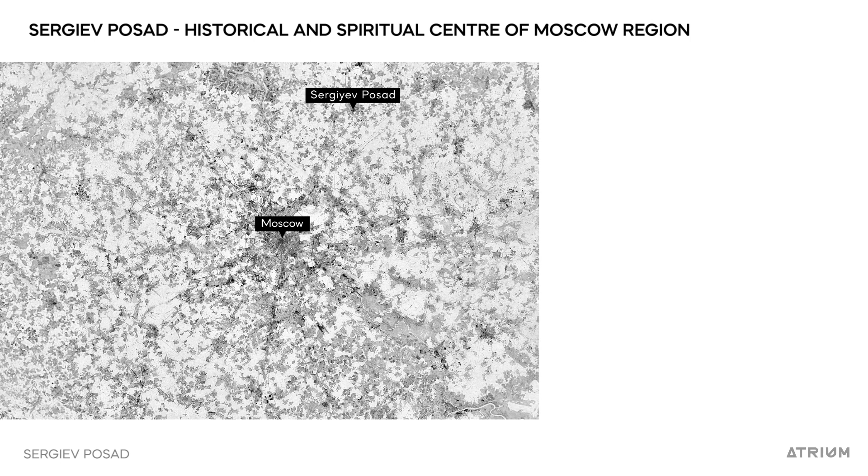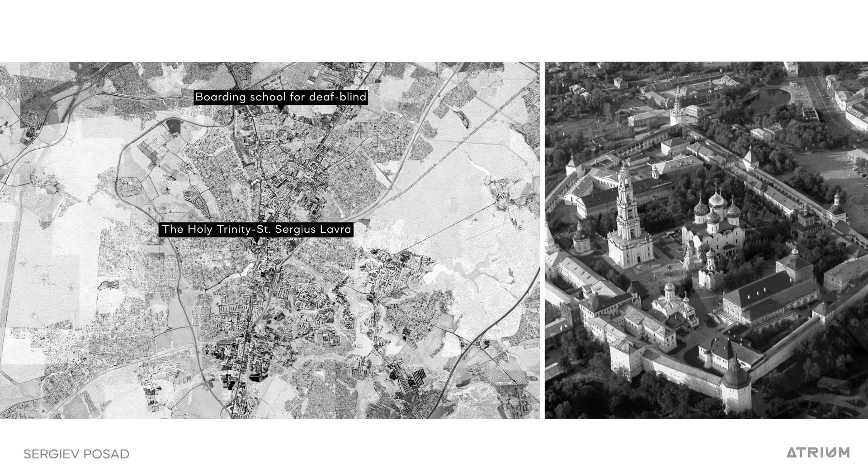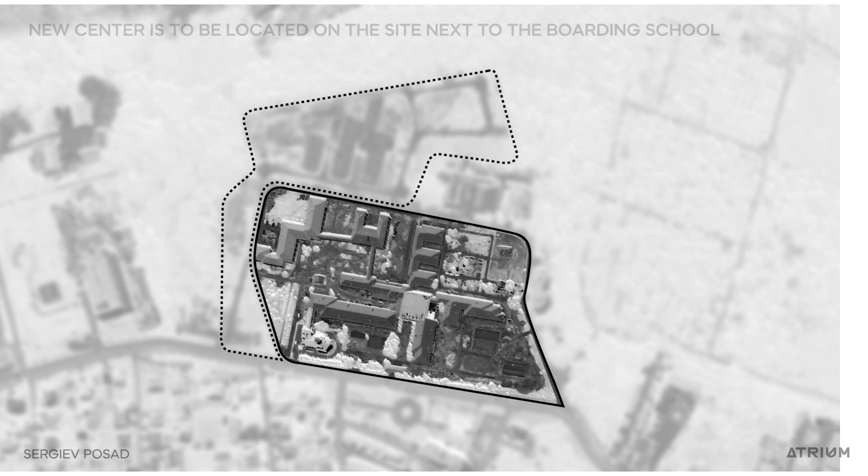The new center is a training ground for social and professional adaptation for the deaf-blind. It will provide a complex and saturated environment as a means for preparing for independent life. The design is based on 3 main principles: the building as a prototype of the city, a path as a space for interaction, materiality as navigation.

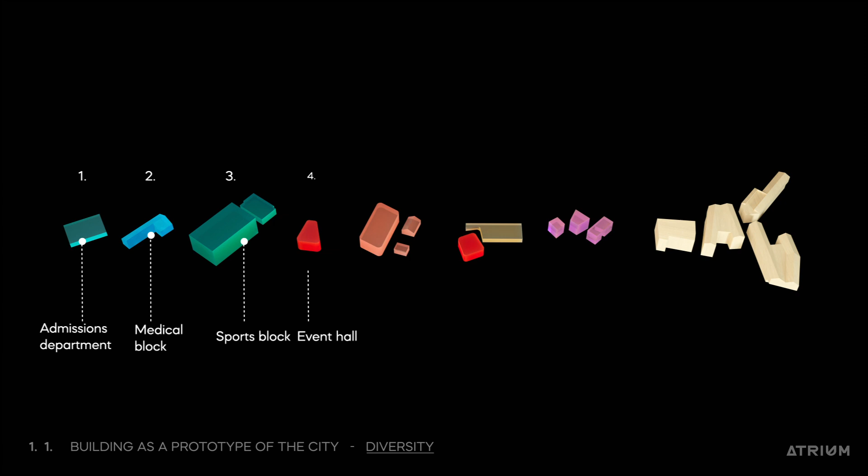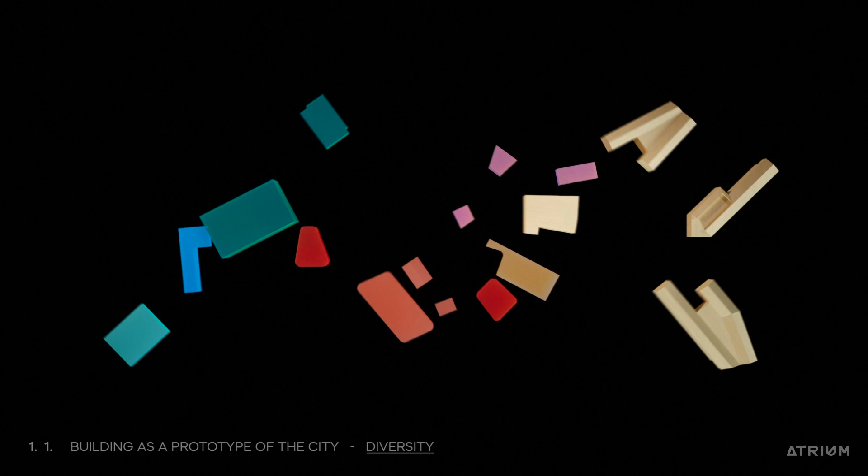The proposed building consists of several blocks, each with unique functional properties. Here, young residents will live and receive special education and medical treatment. They will be involved in public events and socialize, do sports and practice crafts. The blocks are composed in a circular pattern and are united by a common space.

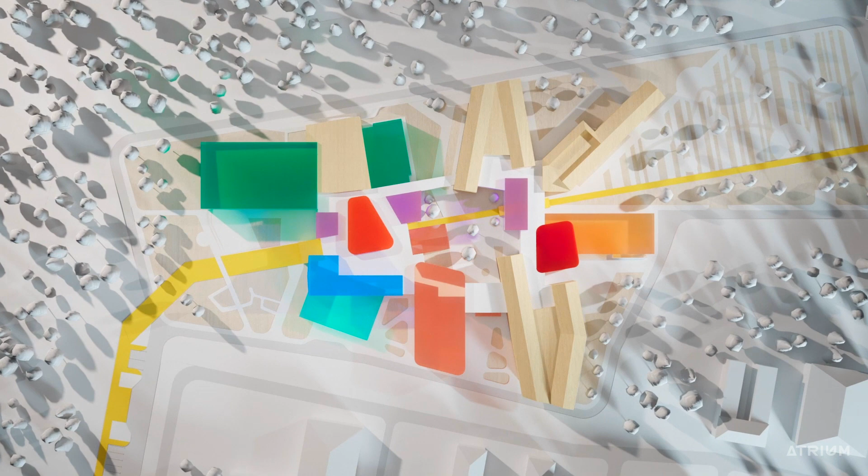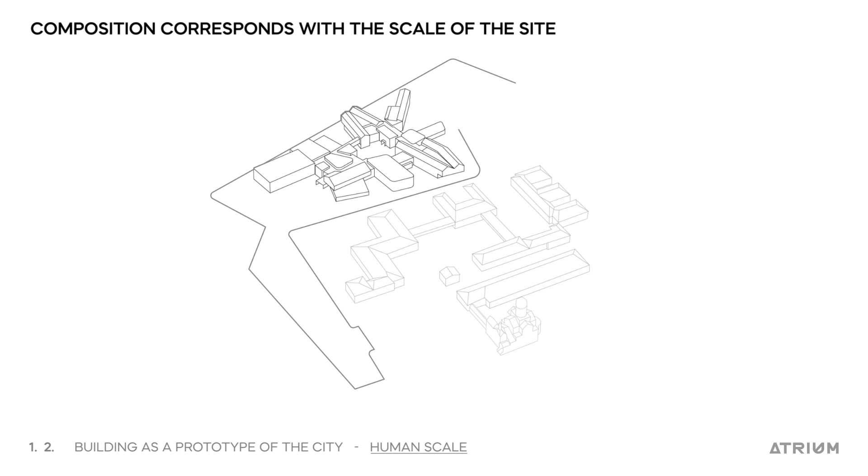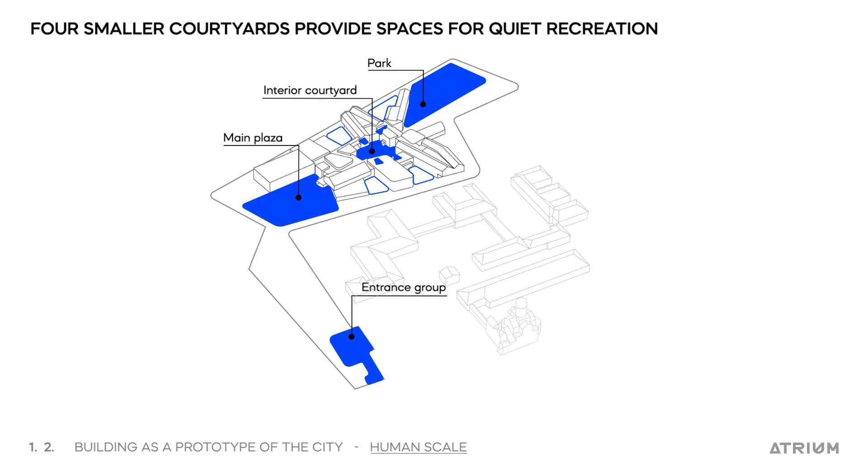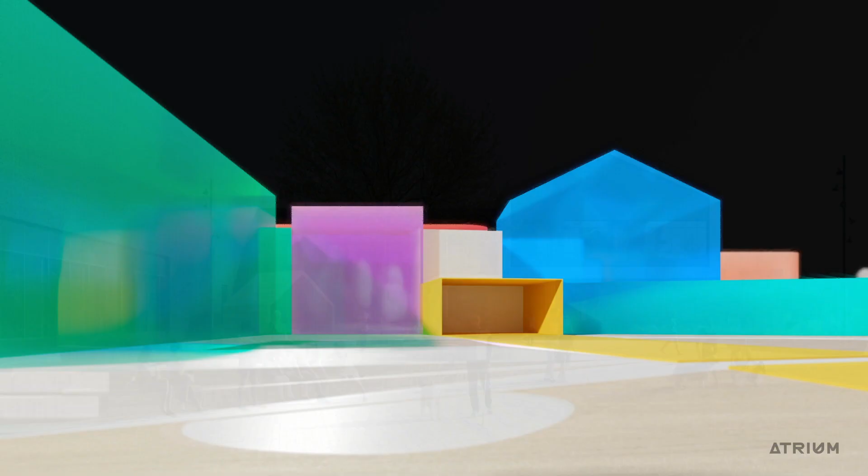They are composed in combination with a series of courtyards, creating possibilities for a range of purposeful scenarios. The composition of courtyards and blocks corresponds with the scale of the site and its users. 4 main courtyards define vivid outdoor attraction points. 4 smaller courtyards provide spaces for quiet recreation. The main courtyard opens up the front view of the complex. All significant public events will take place in front of the main entrance.

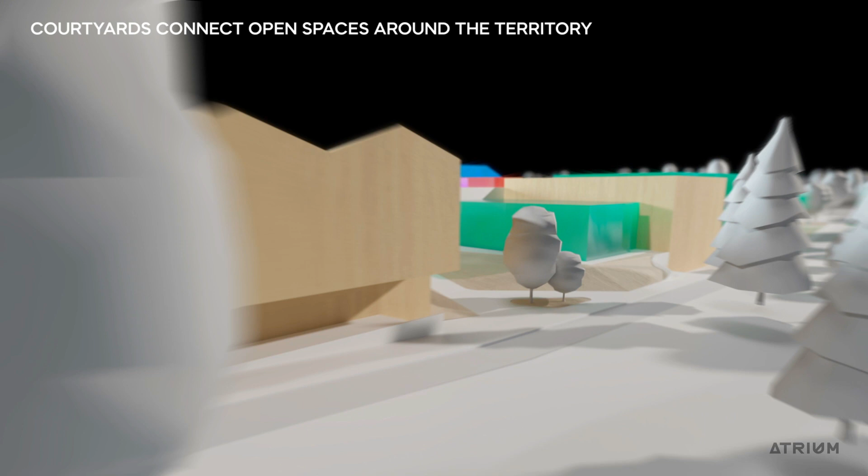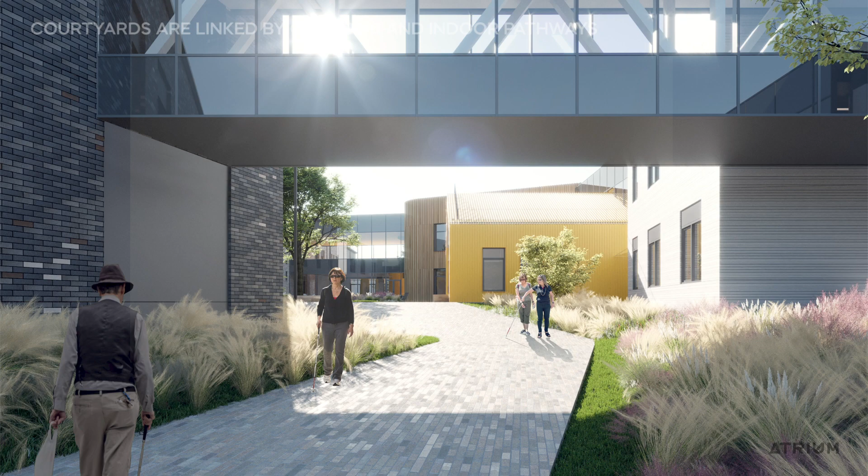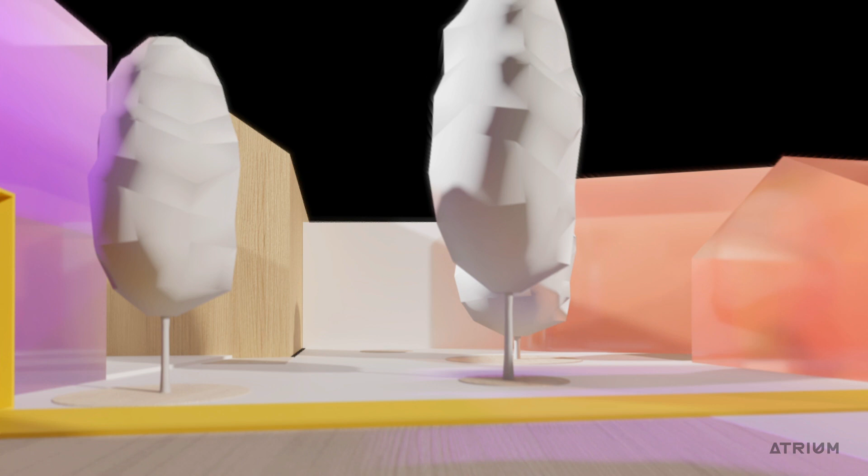Courtyards between blocks provide connections with open spaces around the territory. All courtyards are linked by pathways, outdoor as well as indoor. The interior courtyard can serve as a space for recreation and communication, and be used as a training ground to learn necessary orienteering skills.

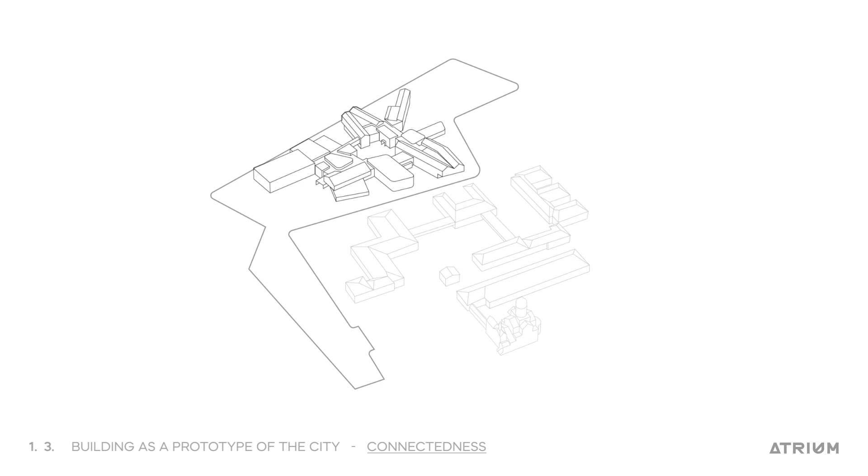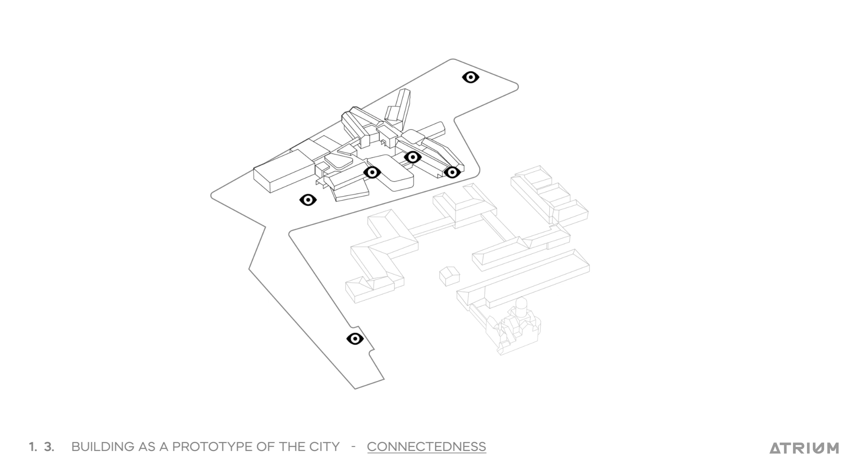The complex is spatially and visually connected to the surrounding architectural context. It is surrounded by a peripheral road. The green landscape is maximized as a way of continuing the forest on the north side of the site. Most views oversee the historic architecture located nearby. The center has pitched roofs, which resemble those of the boarding school.

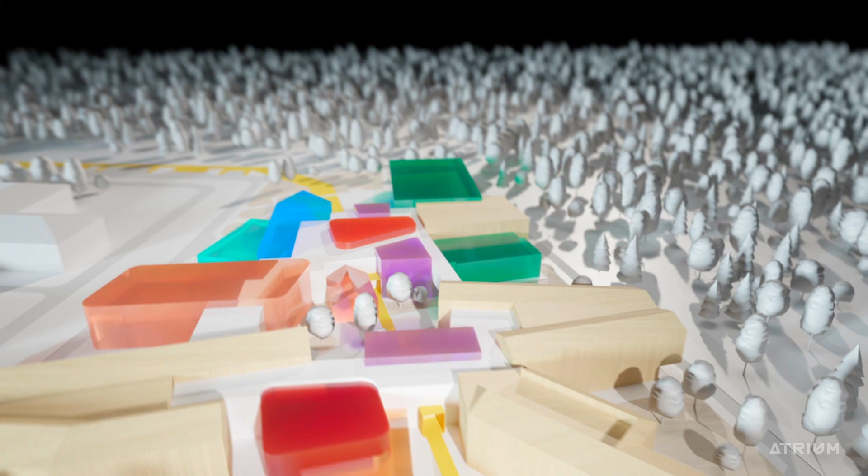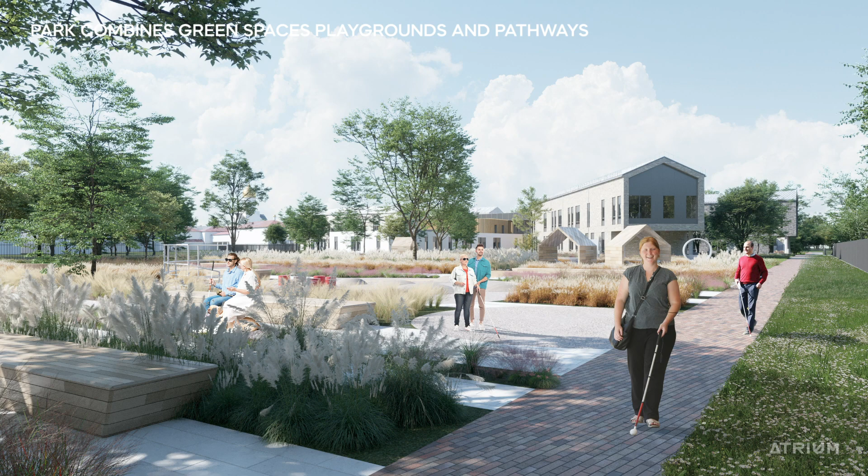Features of the architectural context, together with the diverse composition of blocks, shape the identity of the park. The park combines green spaces, playgrounds and pathways covered in different materials. The complex creates a balanced environment with its surroundings.

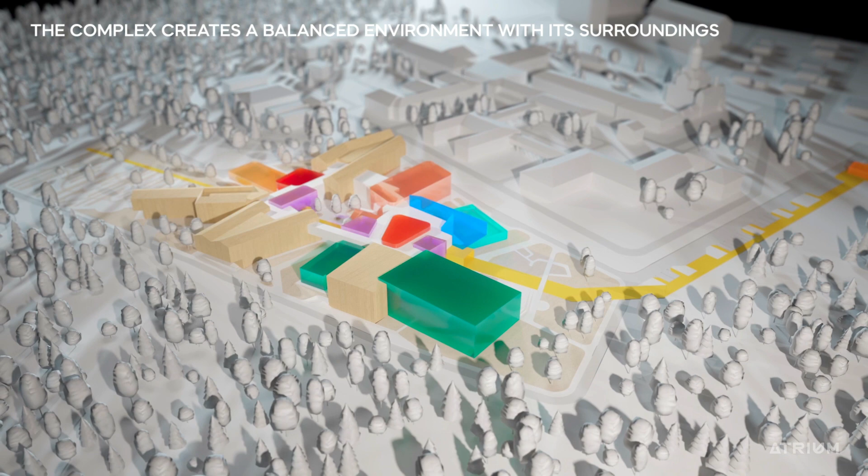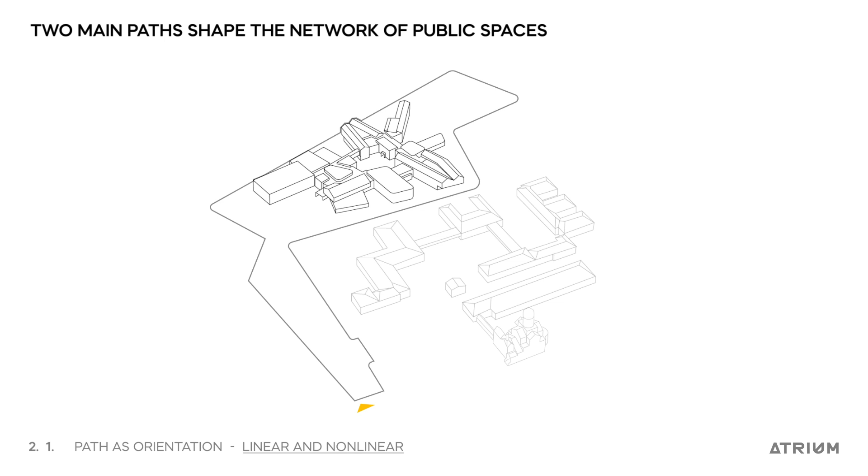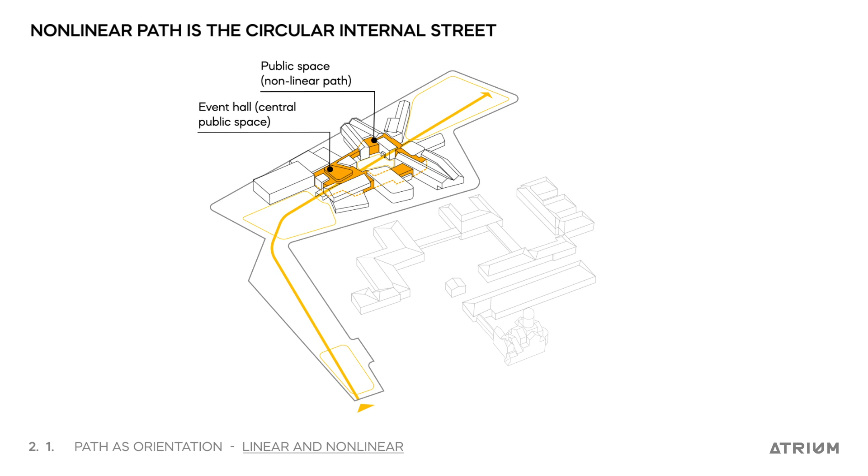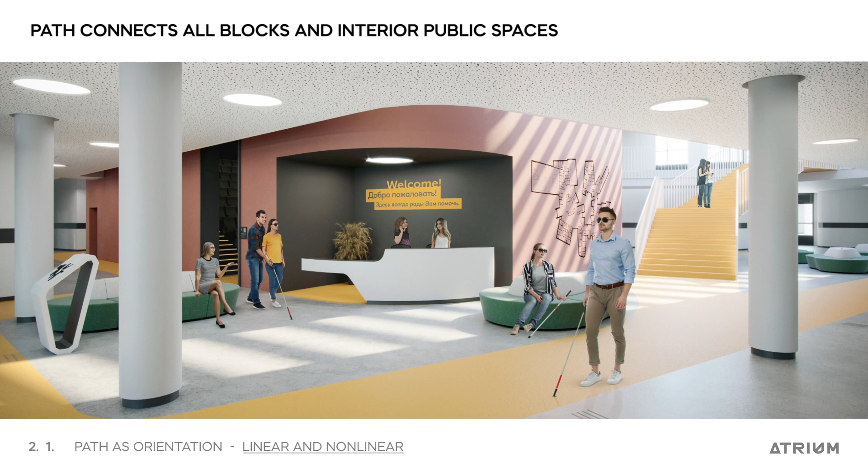Two main paths shape the network of public spaces. A linear path creates a direct connection between main courtyards. The non-linear path is a circular internal street. The path enters the building through accentuated entrance groups. It connects all blocks and interior public spaces. The path also leads to the main event hall.

In combination, the paths provide a space for learning orientation. These main streets of the complex provide possibilities for different scenarios. They recreate a lively and diverse public environment, similar to the streets of a city.

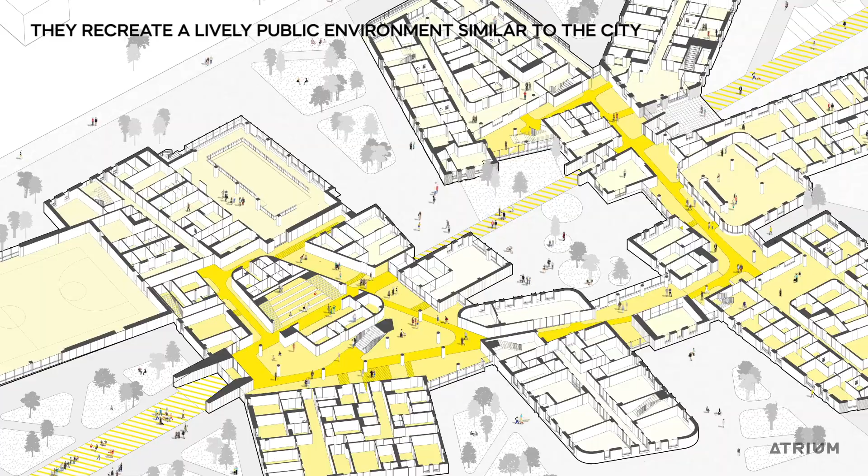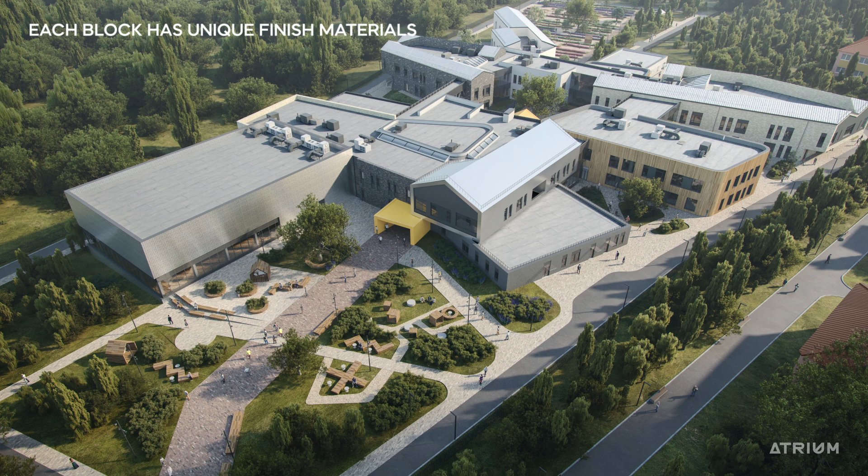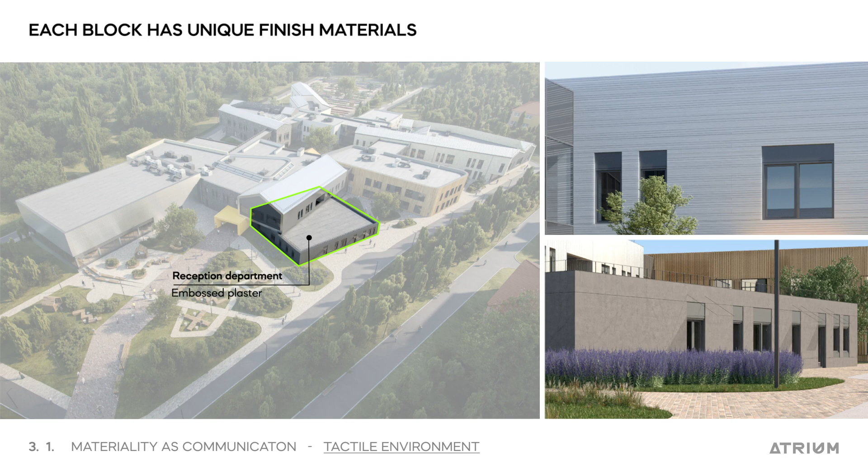Materiality helps the deaf-blind to navigate through tactile interaction. It is a mnemonic language of architecture. Each block has unique finish materials. Perforated and profiled metal sheets. Embossed and rusticated plaster. Wide and narrow metal laths. Painted surfaces and clinker bricks.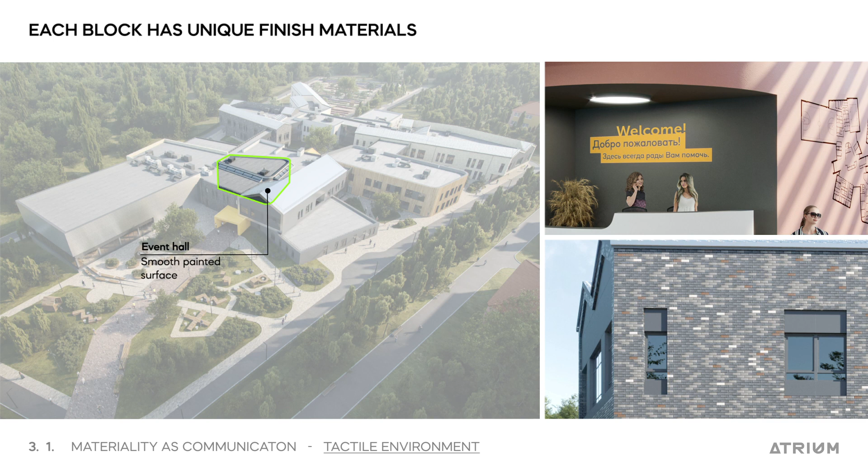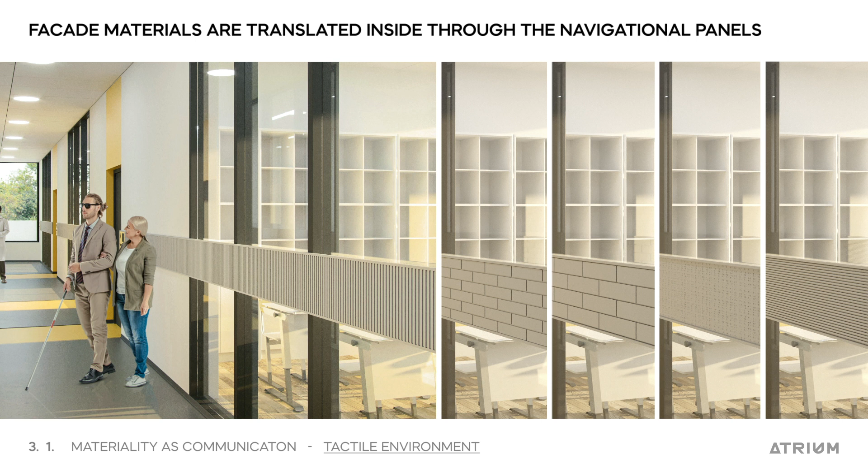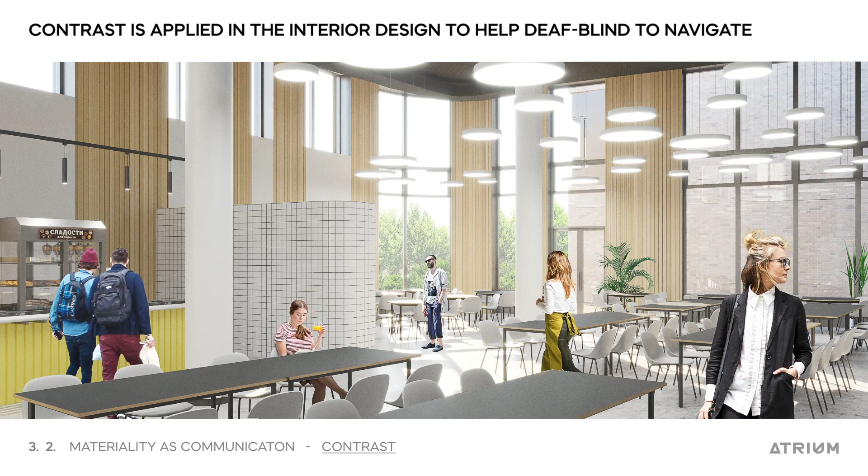Facade materials are translated inside through the navigational panels. In a similar way, materials of the floor covering vary for different paths. Contrast is applied in the interior design to help the deaf-blind to navigate. Walls, floors and ceilings are finished in contrasting colors.

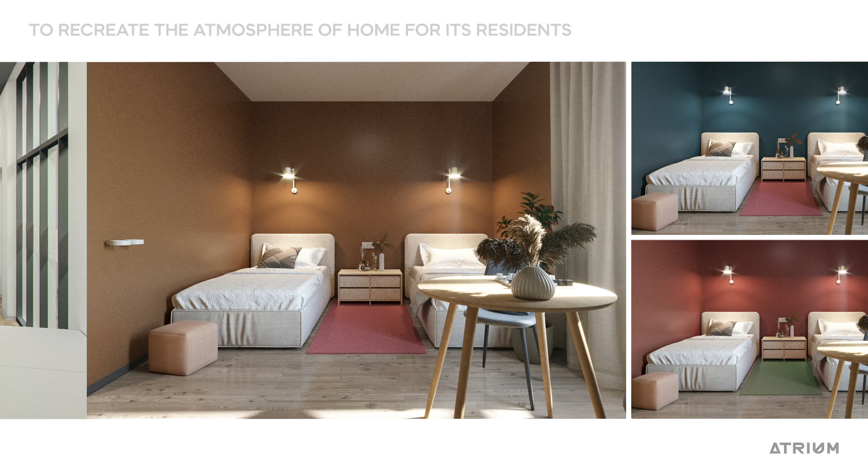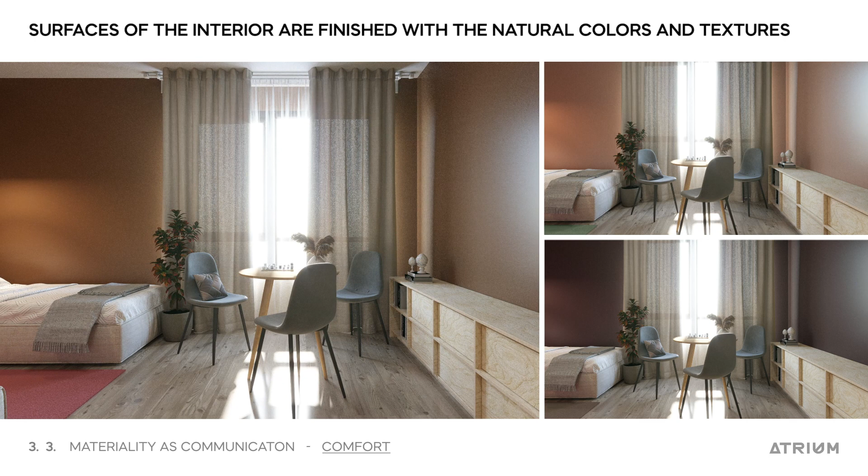The project aims to recreate the atmosphere of home for its residents. The atmosphere is recreated through the careful choice of materials. All surfaces of the interior are finished with natural colors and textures.

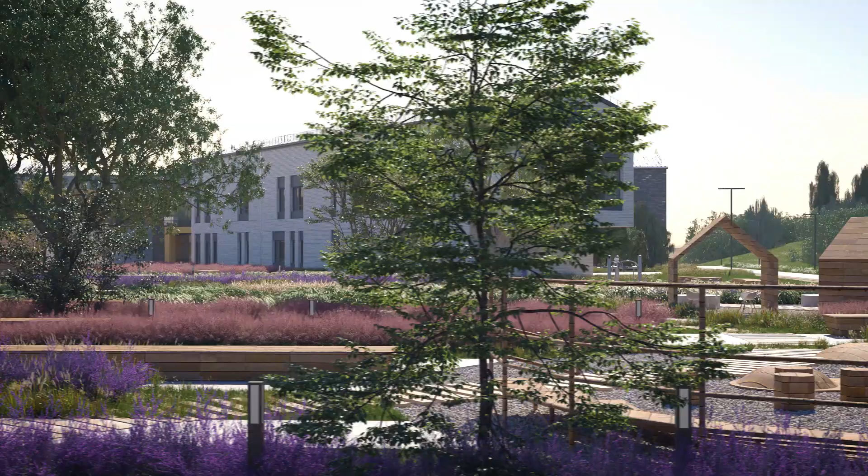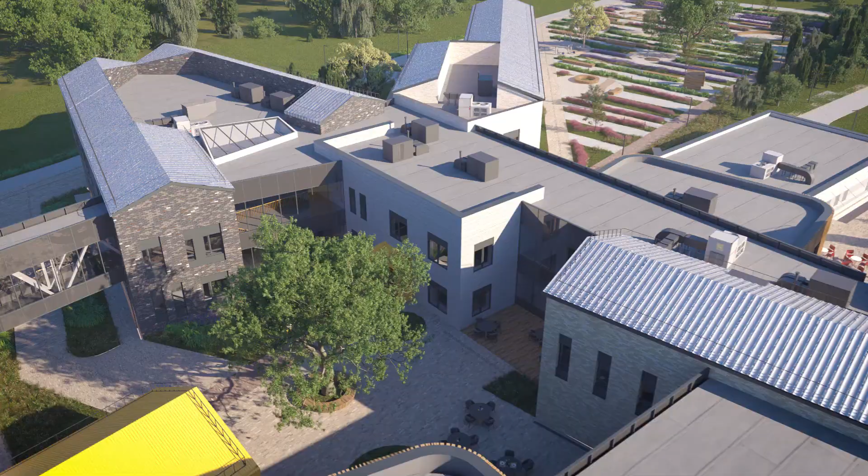The Social Rehabilitation Centre and Post-Boarding School Support will become a home for young deaf-blind people. Here, they will feel safe, comfortable and confident. They will be able to grow, intellectually, socially and physically. The centre will be a prototype of the city, helping its users to adapt and live a full-fledged life.